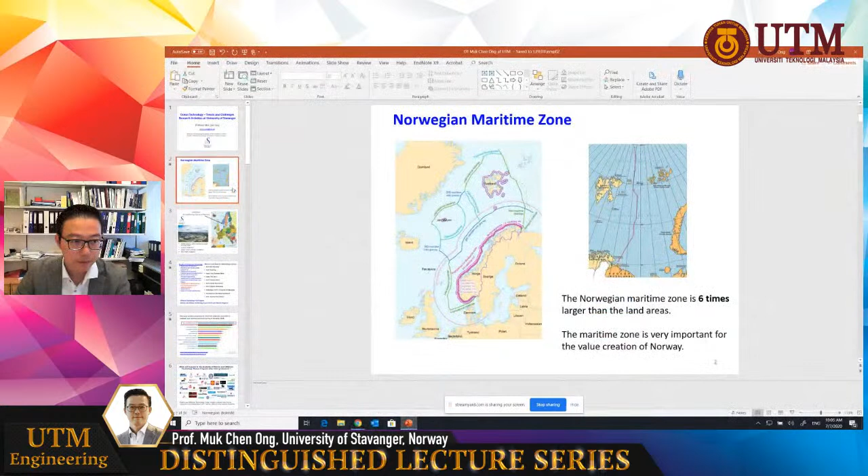Sorry, Prof, you forgot to share the screen. I forgot to share the screen? Let me see. Can you see the screen now? Is it good? Okay, thank you, Prof. Ong. It's okay now, thank you. Okay, sorry for that, some technical problems here. Okay, I'll restart the presentation.

Today I will present the topic of ocean technology trends and challenges, mainly focused on the activities in Norway, and I will also talk about the research activities at University of Stavanger. First, I'll give an introduction, talk about Norway, and how Norway actually gets its wealth. Norway is one of the richest countries in the world, and we get this wealth actually from the sea. This is because the Norwegian maritime zone is 6 times larger than the land area. A lot of people know that Norway also gets a lot of fortune from oil and gas, so the maritime zone is very important for the value creation of Norway.

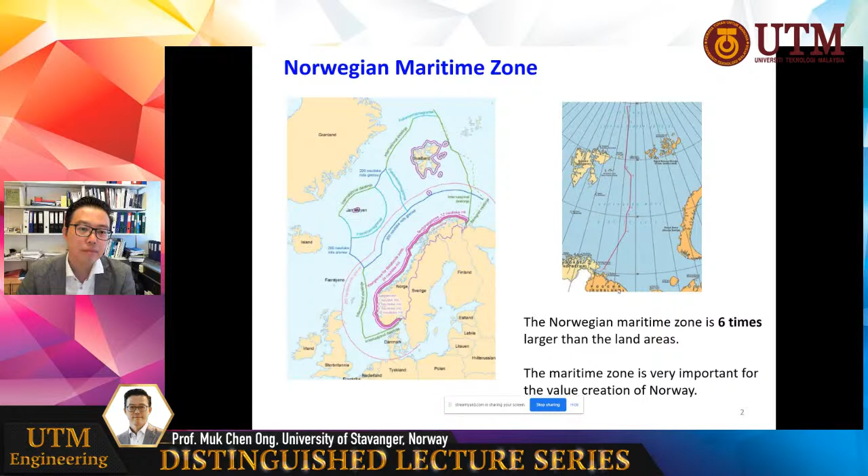First, I would like to give an introduction about my university and the city. We are located in Stavanger. Stavanger is known as the oil and energy capital of Norway because most of the North Sea oil field is near Stavanger. Our university is the 5th largest university in Norway, and we have 1,600 faculty, administration and service staff. We have 12,000 students, 1,560 international students, and 265 PhD students.

And this is the campus. So we are a compact campus, all the faculty is in the same campus, and we are surrounded by the sea.

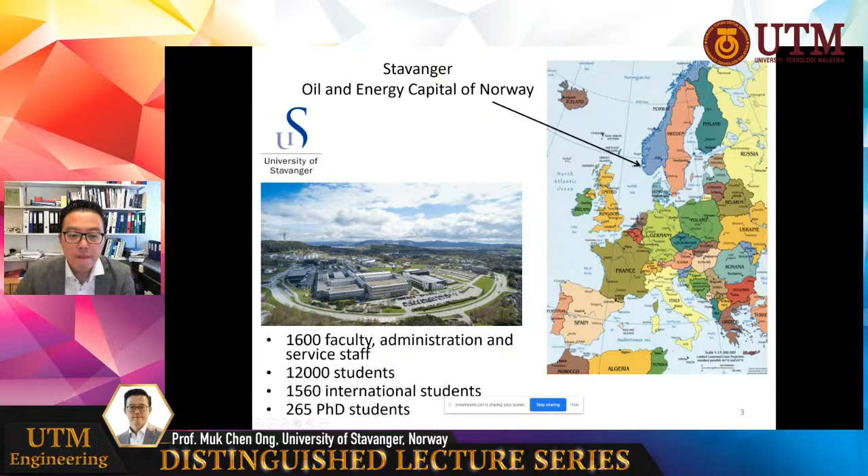First, take a look at our faculty. We have several departments in the faculty, 7 departments in total. My group is at the Department of Mechanical and Structural Engineering and Material Science, and the marine group is one of the divisions in this department.

In the marine and subsea technology group, we have around 10 professors. We have full professors, associate professors, and also adjunct professors from industry, from big companies like Equinor and Subsea 7. We also have senior professors as professor emeritus in the group.

We are running a PhD program, the offshore technology PhD program, and we also have a direct 5-year master program and a 2-year international master program in marine and offshore technology. I'd like to let you know that education in Norway is free. So if a student has finished their bachelor degree, they can go for this 2-year international master degree in offshore and marine technology, and the education is free. The student just needs to pay for their cost of living.

Now look at our master program. For this marine and offshore technology program, every year we have an evaluation. In 2018, our marine and offshore technology program got feedback from students and industry, and we actually ranked #1 in Norway for electrical subjects, mechanical subjects and mechanical engineering. It means that our study program is very popular.

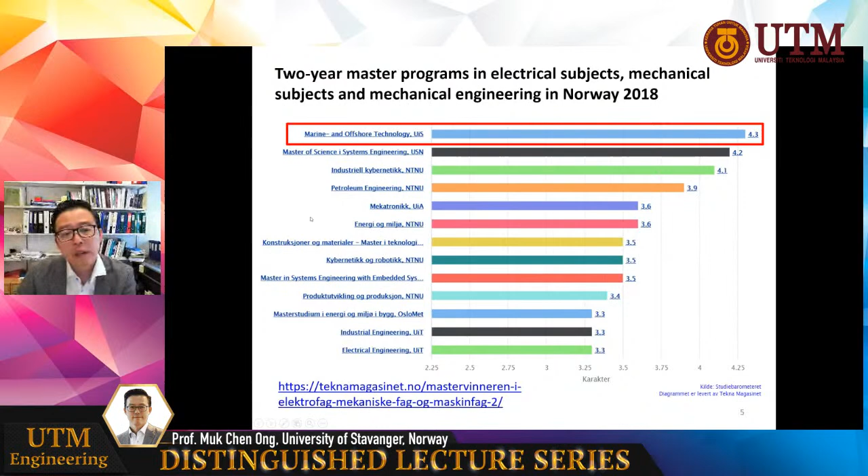After graduation, students can join companies like Equinor and Aker BP. They can even become PhD students at NTNU or our own university, continuing their studies as a PhD student. The PhD student in Norway is considered staff, so they get a salary.

Our marine offshore technology 2-year master program has a very strong connection and cooperation with the marine, offshore and subsea industry, so normally students get case studies from the industry. Why I introduce this is because before we show the topics, we need to know what study program we have so that we can support the industry. So the industry and the university work hand in hand in Norway, very closely.

Okay, now we have the study program, the teachers, and the students. Now we try to talk about the strategic areas. In our university, we have 5 strategic areas. The first one is oil and energy, mainly focused on the reservoir and also other different types of energy.

We also have a strategic area called Ocean. It means that all the research activity happening in the ocean will be covered in this strategic area. And we have health, ICT and infrastructure, and also safety.

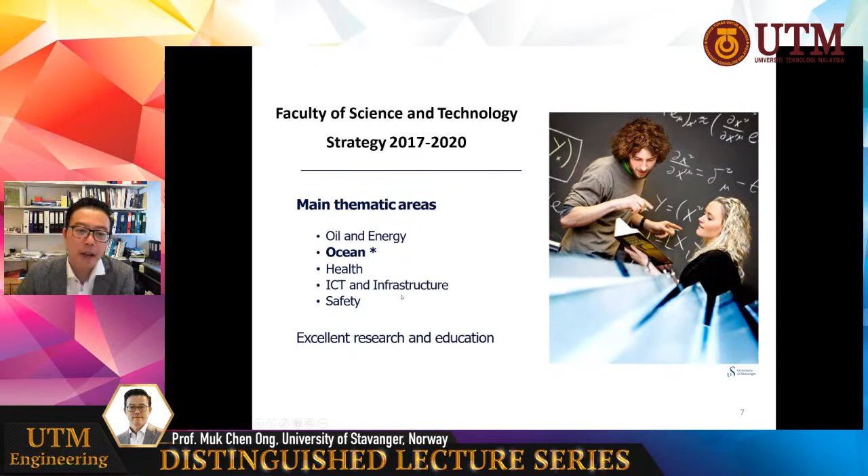I'm the person in charge of the Ocean area. Instead of myself alone, I created a center called OTICS with another 13 professors from 5 departments from the Faculty of Science and Technology, including the business school. So we cover technology, risk management, and also the economy and business. We do that because we also apply for a lot of EU funding, and now all the funding talks about technology, impact factor, and also how to work with social science, so we need a complete team to tackle it.

All these professors come from different areas: ocean technology, petroleum technology, wind technology, also business, also biomechanics. But mainly we are working on topics related to oceans.

Okay, now we have the people, we have the topic, and then we are trying to see what kind of tools we have. First we talk about our competence.

We focus a lot on the marine advanced computational job, the research work. So I have a group called Marine Advanced Computation Group, and what we focus on is marine operation and installation. When we work with industry and train students, we want them to do well in the industry, so all the simulations should be fast and accurate. We work on marine operation and installation, which can provide a quick solution to the industry.

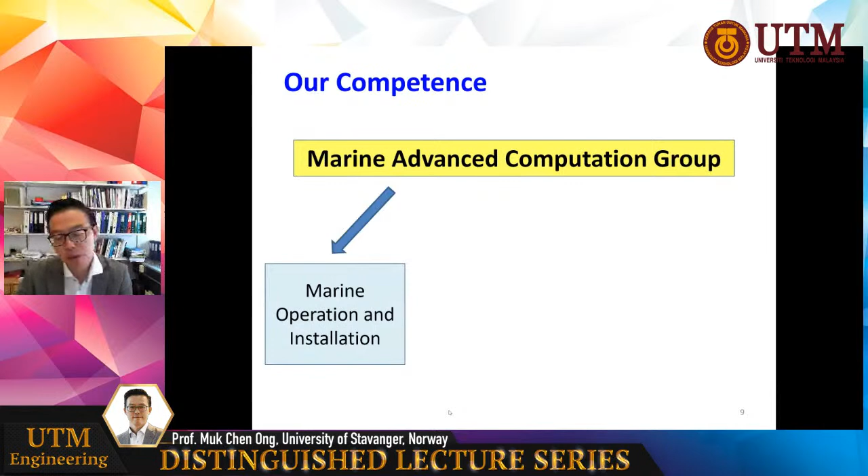Next, we have the high fidelity research work on marine CFD, marine computational fluid dynamics. This is high fidelity, and we use supercomputers to run the case so that we get the high fidelity result, to support the marine operation and installation.

Also, we have another team working on advanced mechanical analysis. This is mainly focused on material technology, because in the subsea, the materials are very important. So these are the three main lines of what we are doing at the University of Stavanger.

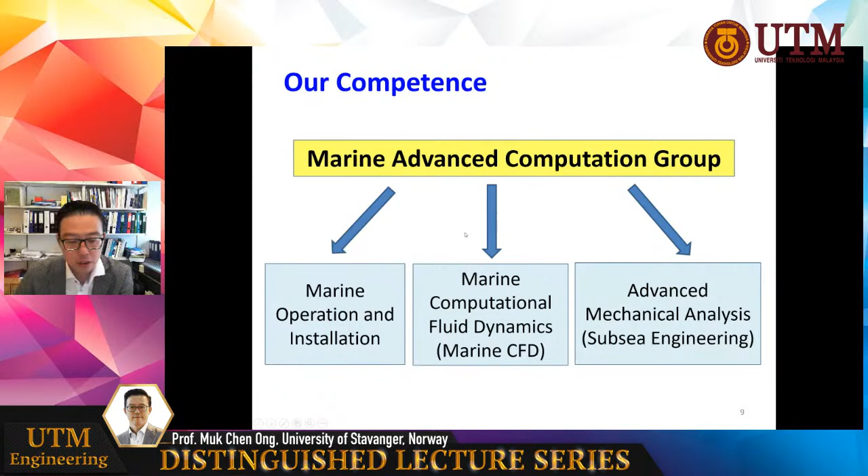Before we go into the topics, we like to see what kind of tools we need to do the job. We have SIMA, the Simulation Workbench for Marine Applications, created by my previous employer, SINTEF Ocean, because I was a researcher there, one of the largest research centers in marine technology. So we have this software called SIMA.

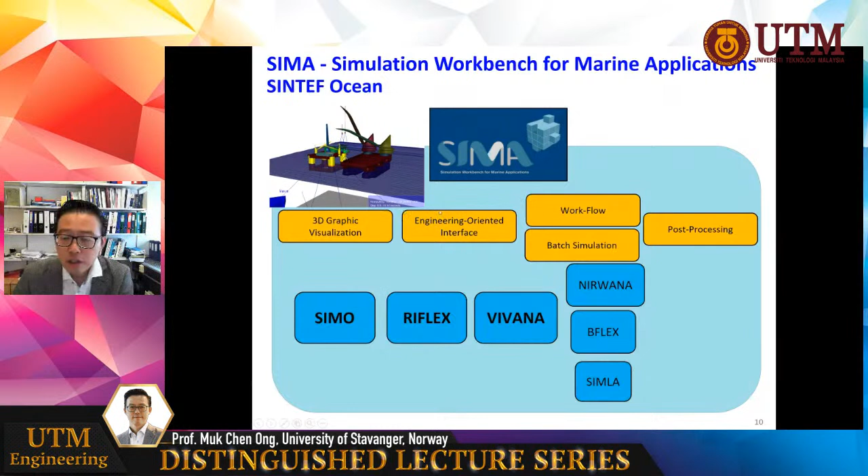Now SIMA is managed by DNV GL for selling, meaning it's sold through DNV GL. We can do lifting operations, we can do the dynamic response of the fish cage, large fish cages, semi-submersible type fish cages, and also we can do VIV for riser and pipeline, and fully coupled offshore wind turbine simulations.

We also work on a lot of open source tools. I would like to introduce this one we are working on, called Code_Aster. Code_Aster is actually created by EDF in France. They use this code to do nuclear plant design. It's not meant for marine technology, but as a university, we like to have open source so that we have better control of the simulations.

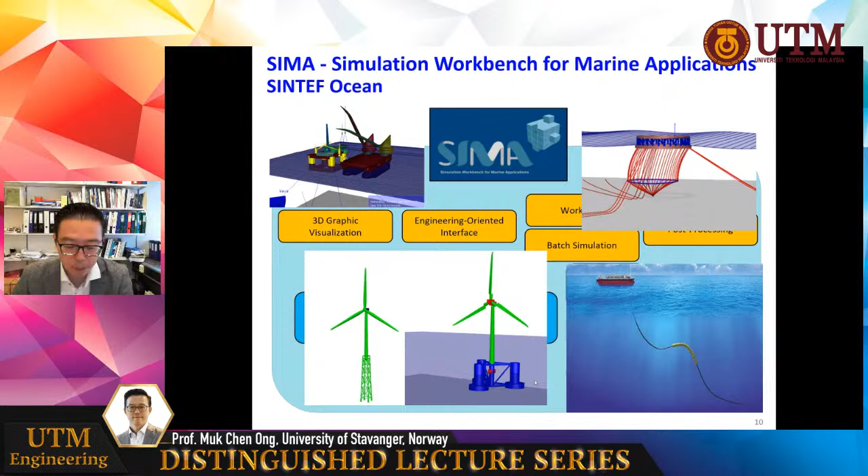The previous one, SIMA, is a commercial code. As a Norwegian university, we can write the DLL, because I worked in SINTEF before, so we can modify the code together with SINTEF, but not for people who just purchase this commercial code. For Code_Aster, you can change the code, you can modify it. For example, this code is mainly built for nuclear plant design, but we actually transformed it for marine technology.

Like this is the dynamic response of the fish cage. We write the hydrodynamic code inside so that we can predict the behavior of the fish cage.

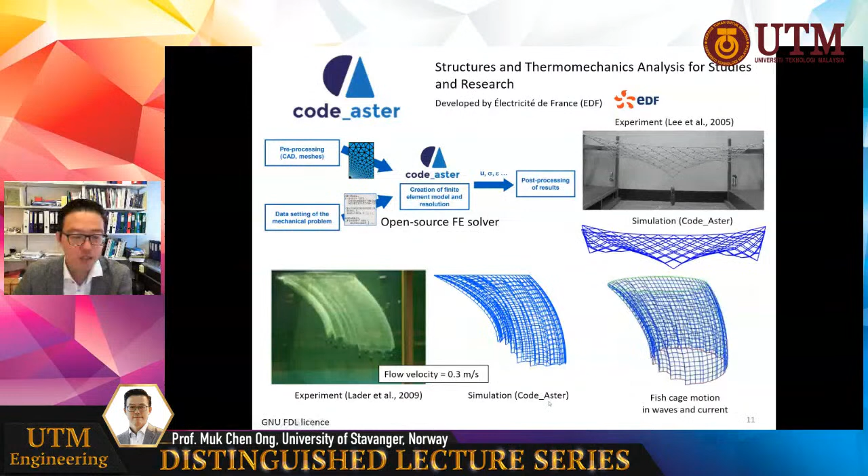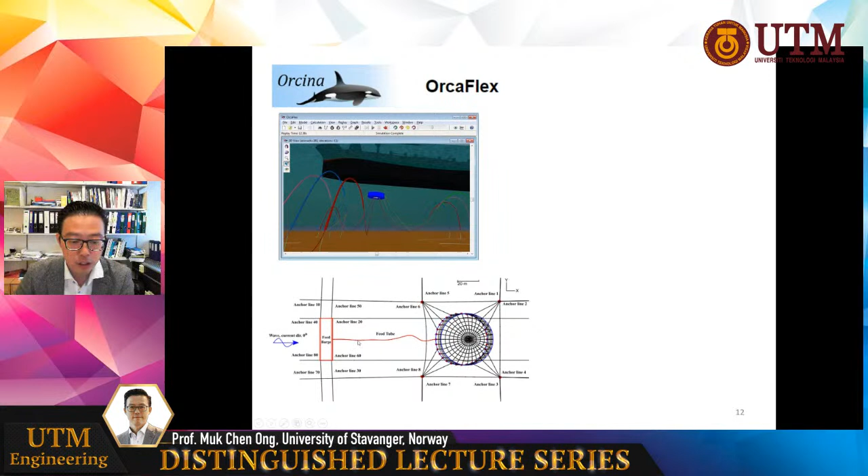We also teach OrcaFlex in our study program, because OrcaFlex is a very important commercial code for students to get a job, and we like to ensure our students will get jobs. This is using OrcaFlex to simulate the feeding hose, how the feeding hose actually supplies the feeding tube to feed the fish in the fish cage.

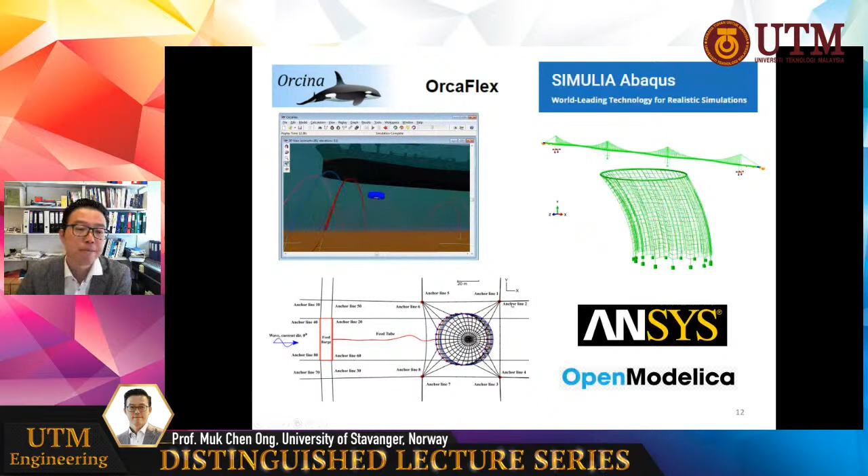We also work on Abaqus, which can do bridges, offshore bridges, including the fish cage, and we also have ANSYS and OpenModelica, also open source, to do offshore wind turbine simulations. So all these software provide quick solutions.

Now we talk about the high fidelity software, the code we are using. We are using OpenFOAM, which is open source CFD software.

For example, on the right side, I show you two pipelines. This is a project I worked on together with Equinor, previously called Statoil. What we are doing is trying to see the interaction between two pipes. The first pipe actually protects the second pipe. You can use the standard, the DNV standard, to design for VIV on the first pipe, but not the second one, because the second one is subject to wake-induced vibrations. So then we need to use CFD to simulate the direct response of the second pipeline.

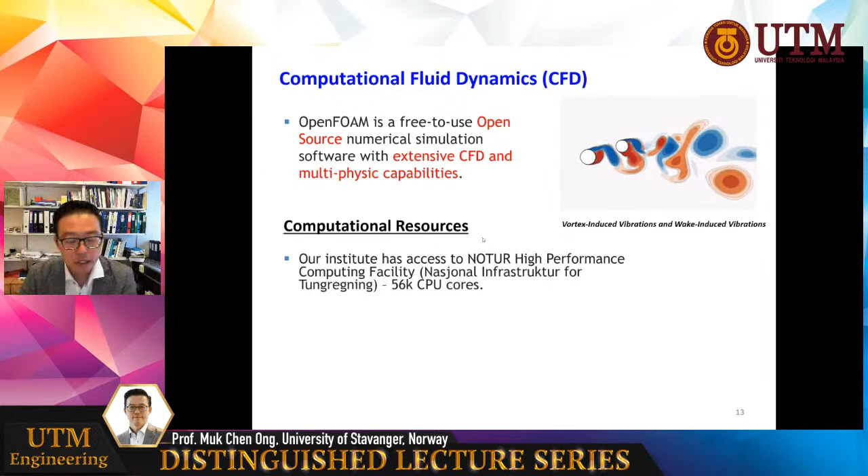If you talk about CFD, we would like to talk about the computational resources we have, because it's very important to have a strong computer and cluster to do the job. Our institute has access to the NOTUR high performance computing facility, a national infrastructure with 56,000 CPUs. We get a minimum of 3 million CPU hours per year from NOTUR, meaning I can run 345 CPUs in parallel for 365 days.

It means every day non-stop, every second I can run 345 CPUs. This is only the minimum. If we need more, we can request more CPU time, as long as, of course, we come up with good publications and good research work.

And ourselves, we have bought a supercomputer cluster in our own university. We own 584 CPU cores for small scale simulation.

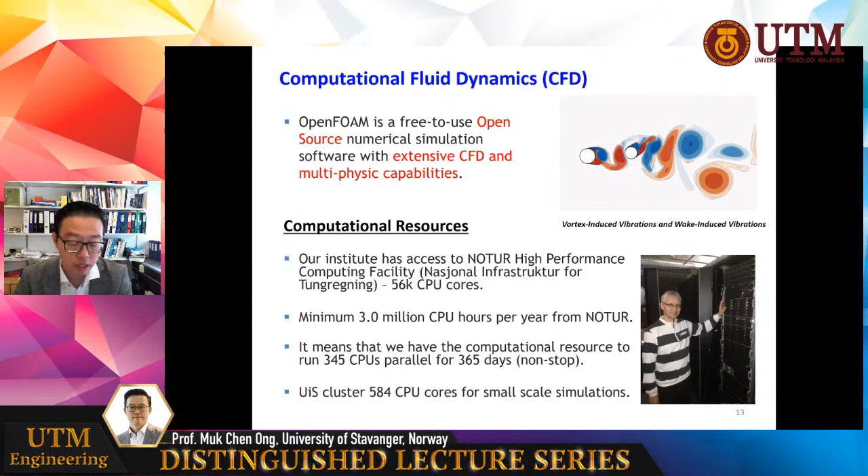You can see this guy, he's very happy because every time I got money for him to buy the computer, he's so happy because he likes to do Linux systems, and he helped me maintain all these CPUs at our university. Mainly when the PhD students are working on big simulations, they use the national infrastructure, the supercomputer. And when the master students or bachelor degree students are doing small jobs, they use our own small cluster, the 584 CPU.

Okay, so we have these tools. Now we have the study program, we have the teacher, we have the students, and we have the tools. It's time to look into the topics.

Currently you need to use the ferry to transport the car. So we're going to build submerged bridges and tunnels, and all these activities differ depending on water depth. In different water depths, we have different activities, so we design the areas based on all these activities.

Based on the current situation in Norway, we educate the students. What is important for the student? To get a job. They want to get a job, they want a good job, they want to buy a house, get married, and have a good life.

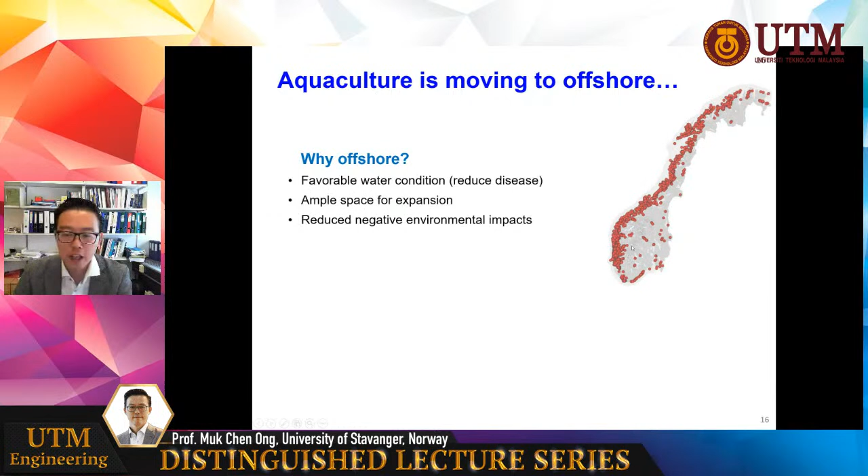It's quite crowded, and the Norwegian government cares about pollution and environmental issues. So they hope fish farmers can move the cages offshore, to get better quality fish and also to protect the environment. But offshore, we have challenges.

What are the challenges? There are harsh environmental conditions—larger wind, wave, and current loads, which are very tough for structures. We need to design robust structures. For example, with fish farming, the fish are inside the cage.

What are fish afraid of? Fish can get seasick too. If you have large acceleration, like sitting on a flight where the speed changes—acceleration or deceleration—you get sick, feeling like you want to vomit. It's the same for fish. They need a very good environment to stay inside the cage so they can grow in a better way, giving you better fish.

So the design of robust structures is very important. We also talk about operation and maintenance costs, because going offshore increases operation and maintenance costs. These are all new challenges we need to think about.

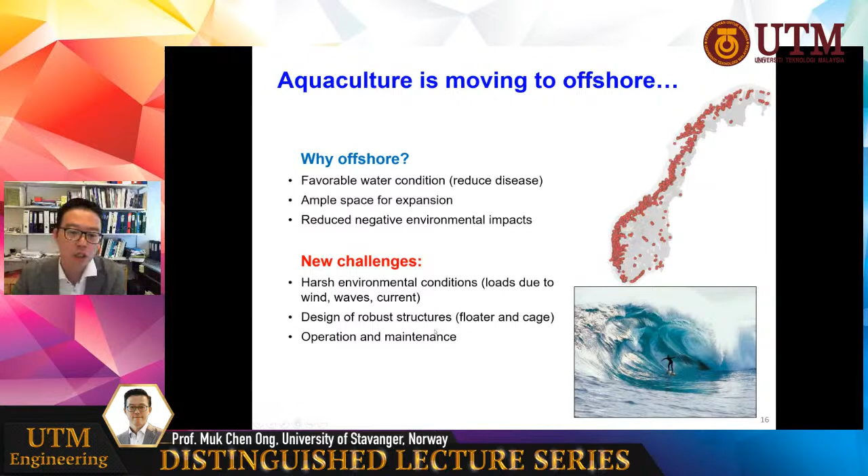When we are doing this aquaculture technology, we start with the conventional fish cage, which is a gravity-based fish cage. This fish cage is light, and the significant wave height they can withstand is up to 2 meters, with around 200,000 salmon inside.

We also work on this single moor system, so that this mooring is like one single point moor. Then the fish cage can turn around the anchoring point, so that you get better flow conditions.

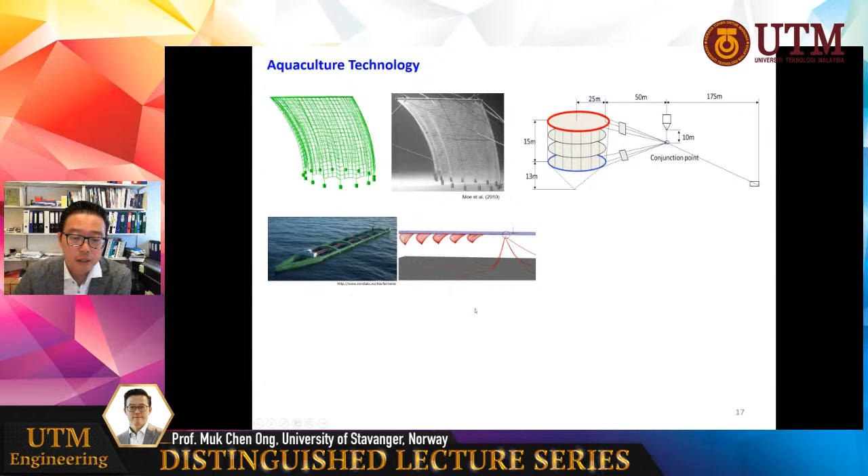We also work on the large fish cage, like for example, this cage is called Havfarm, and you have 2 million salmon inside. Then we study the dynamic response of the fish cage, and also we have the semi-submersible fish cage. We work on this also. All this work has been done by our master and PhD students together with the company.

We are also working on the feeding tubes and how this feeding tube actually feeds the fish. You see all the fish cages here. Previously they used a boat to feed the fish, but when the boat comes in, the propeller actually destroys the net. All these farmed salmon, it's not good to let them go into the environment, because they behave differently from wild salmon. So in order to protect the environment, they use the feeding tubes.

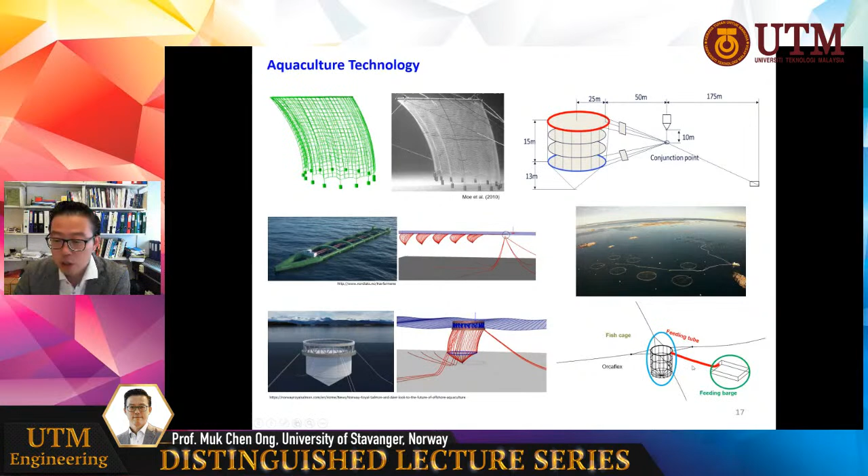But these feeding tubes are subject to fatigue problems. So we do a lot of dynamic simulation to study the fatigue, design, and response of the feeding tube, so that you get a better design for the fish farmer.

At University of Stavanger, we work together with Harbin Engineering University. Actually, we have our own patent, our own fish cage. It's called module-based offshore fish farm. Each cage can accommodate 400,000 salmon or cod fish even, because we use a strong material, so that we can raise different types of fish.

One good thing about this fish cage is that when the flow comes in, there's no blockage of the flow, so you get very good water quality in the fish cage. And even if in some cage the fish is sick, we can remove it and treat the fish in a good way.

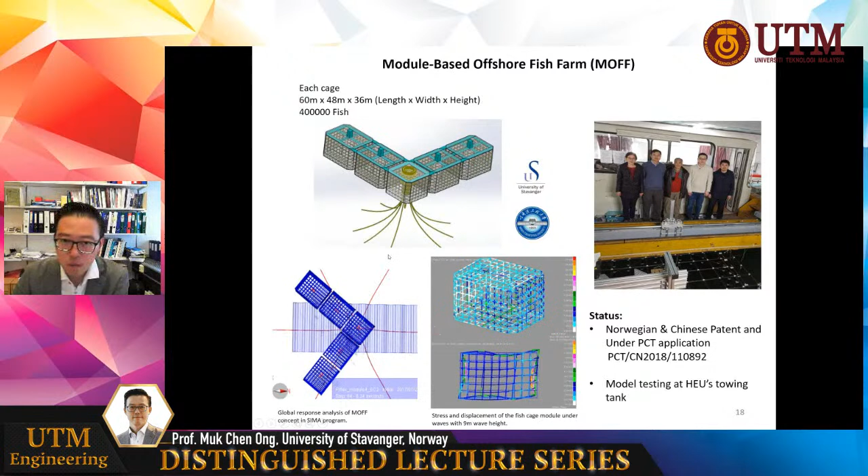So this is our cage called MOFF. We already got the patent, and we even carried out model testing in the towing tank to study the behavior of the fish cage. The next step we are going to do is the sea test.

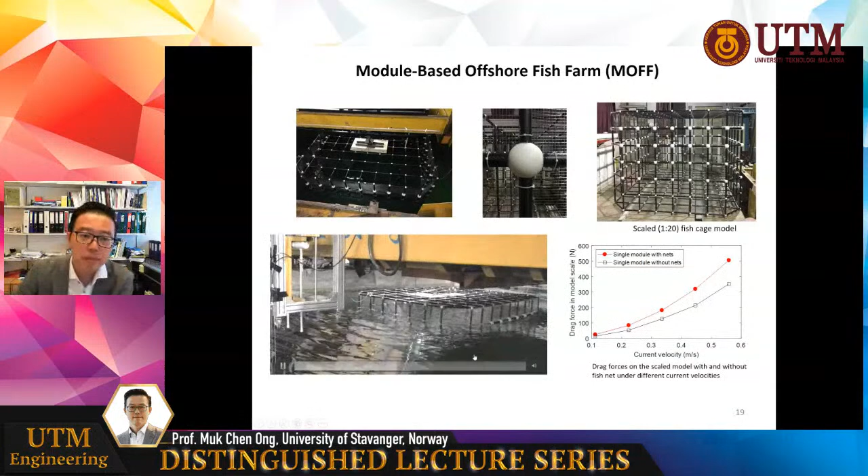Another one I'm trying to introduce to you is the land-based cage. This is called flow-through tank, and we work with South Korea, Chonnam National University. What we are doing here is they have the fish inside the tank, but they need to study the oxygen level in the tank. So what we did is create the CFD model, including the transport equation for the oxygen concentration.

We let the flow come in and study the concentration of oxygen in different areas. If in the empty tank there's a good oxygen concentration, it means that when the fish is inside the tank, the condition will be even better. So this is how we have done the job for the land base.

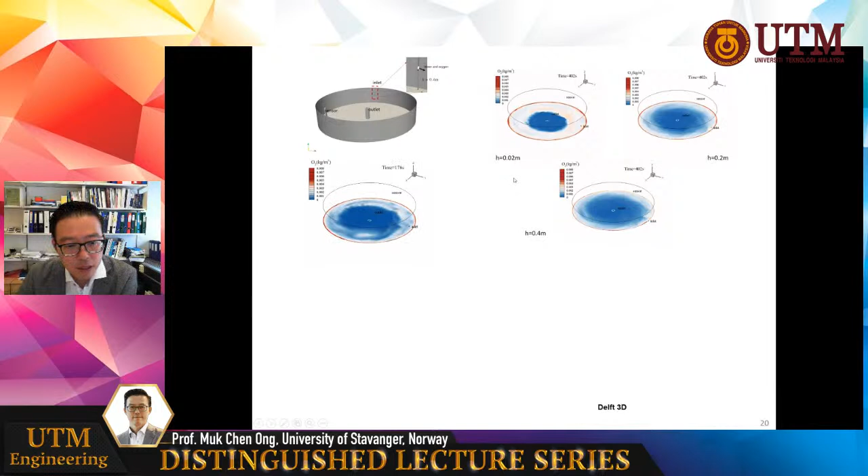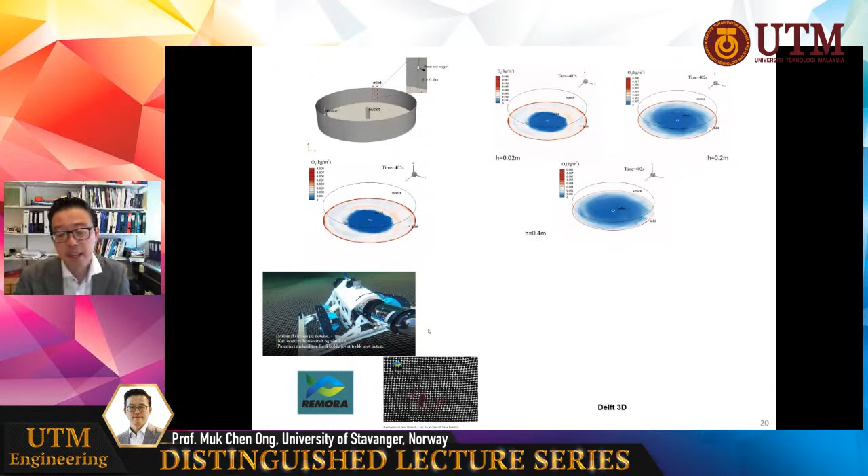We also work on the salmon lice. The sea lice is a big threat to the salmon. We can do ocean modeling because the sea lice actually flows together with the wave and current, so you can see the sea lice is very smart. They attack the fish head, but not the fish body.

In Norwegian fish farming, they use another type of fish inside the cage to eat the salmon lice. But the salmon lice is very smart, it moves to the head so that kind of fish, called lumpfish, has no chance to eat the sea lice.

So the sea lice is very important. We need to have a good flow condition. Then we can introduce the sea lice concentration and put it into the ocean modeling, combine them, and then we know where the sea lice are.

And even we can study the environment DNA. Every fish has their own DNA, like for human beings we have hair, skin, all this - it's called environment DNA. We can use the environment DNA of the prawns or the fish as a source, and then we can know where the fish are by doing these ocean modeling simulations.

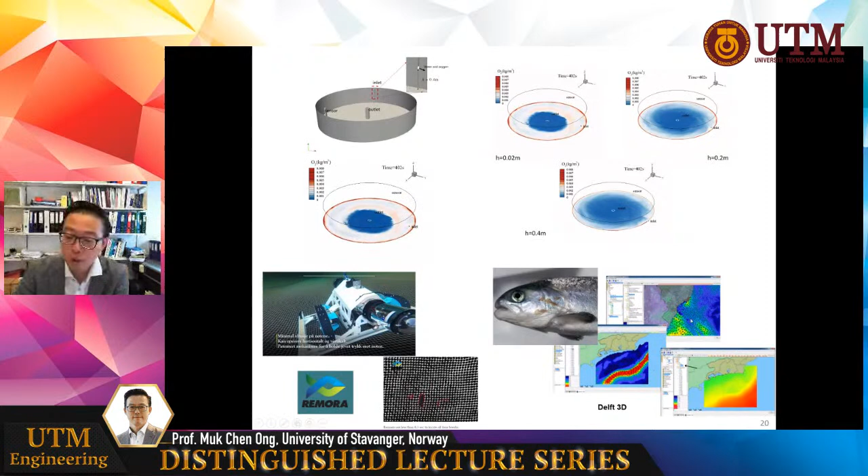University of Stavanger, my team is also part of the research partner in this Smart Aquaculture Research Centre in South Korea. The principal investigator is Chonnam National University, so we work together with them. This research center started in 2019, and total we have around 6.2 million US dollars for 7 years. So we work on different types of aquaculture systems.

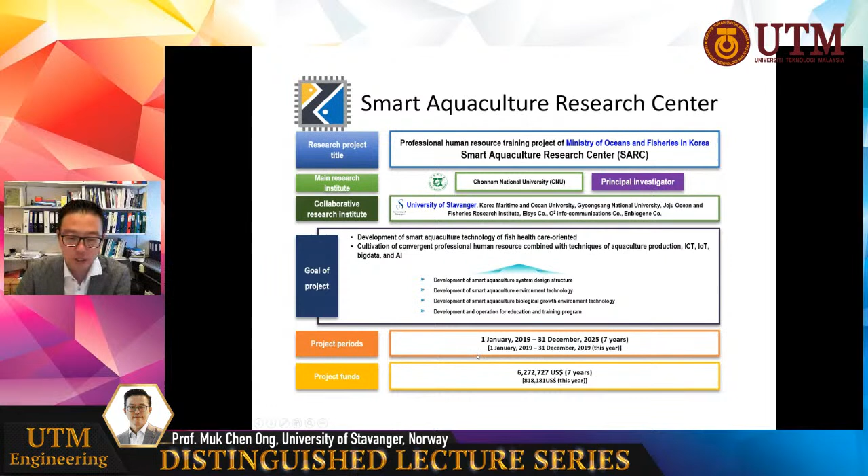Okay, so I have completed the part for the aquaculture technology. Now we go to the next area, which is offshore and subsea technology.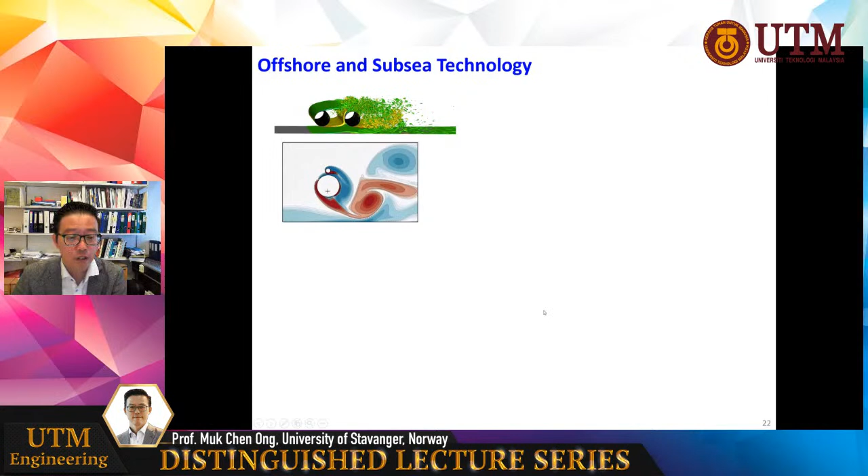We also study the FSI, fluid structure interaction problem for the piggyback, to have a better design of the piggyback. And this work has been used to create a new energy converter for 5 kilowatts, called VMAX - our own invention called Vortex-induced motion energy converter.

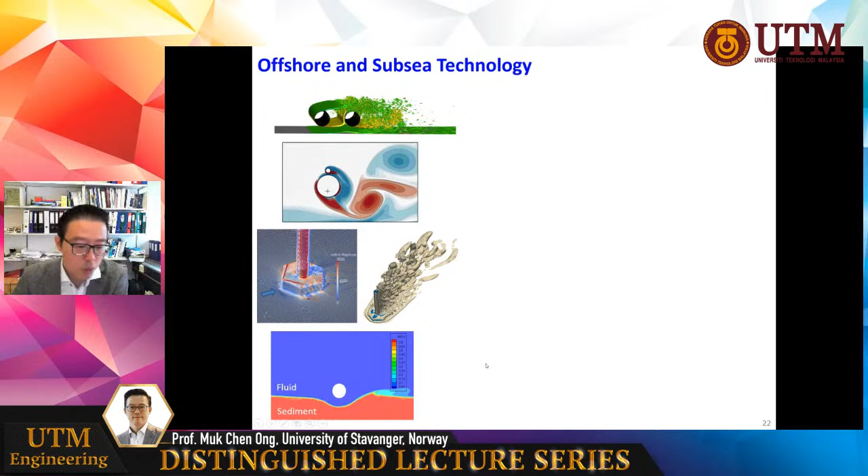We also study the flow around the foundation, the offshore foundation - this is gravity-based structures. We study the flow around the foundation, and we have an open source tool for scour erosion. We are working on this tool to predict scour erosions, and we have already published this open source.

This was created by University of Stavanger, and it's for liquefaction. So you have the wave coming, and you can change the pressure upstream and downstream of the foundation, and then you can create internal flow in the soil and weaken the soil so that the foundation can sink. So this is very important for us to predict the liquefaction situation beneath the offshore foundation.

We also work on the optimization of ROV shapes, and then we study how this ROV can have better performance in the subsea environment.

For example, this ROV - that time we got this job research study - the ROV could not go straight, it always went to one side. Then we used CFD to study the flow around the ROV, and we advised the partner that this part is not good, we can modify it based on our numerical simulation result, and the ROV actually can go straight very well. We also study internal flow, multi-phase flow in the pipe.

And we study the subsea cover. The subsea cover actually is to protect the pipeline and the subsea module. We study the drop object, how the drop object actually hits the subsea cover to protect the subsea module inside it. And we do lifting operations using numerical simulation.

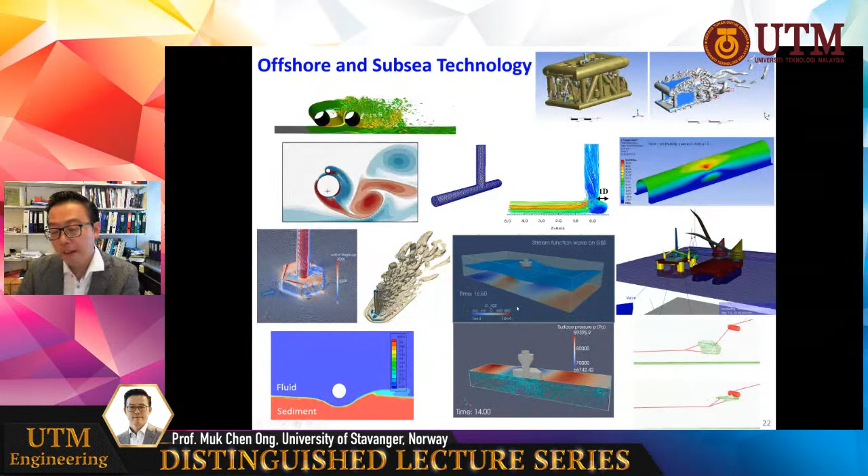In the subsea area we have high pressure. We study the material, the crack propagation, also multi-phase flow, and for the ROV, how to improve the thruster. We use OpenModelica to study the thruster, to find the best configuration for the ROV.

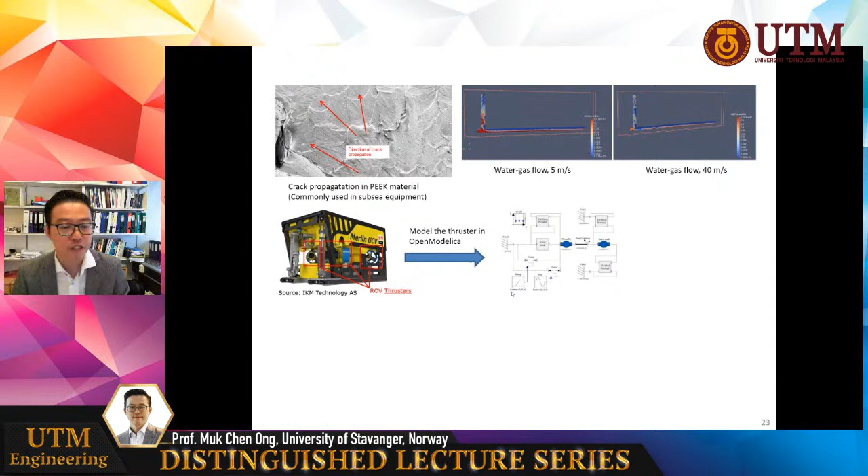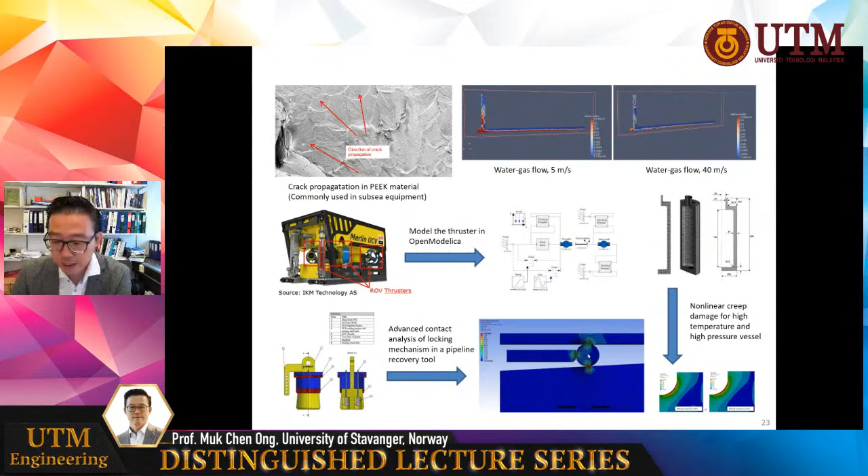We are also working on some special tools to remove damaged pipeline. For example, you have pipeline damage, you cut it, and then you put in recovery tools. We study the contact mechanics so that we can lift the damaged pipeline, which has been cut, up from the sea. We also study the high pressure vessel for subsea equipment.

Now I would like to introduce another project we work on with Equinor. We carried out the prelim study for Equinor. This is a subsea shuttle, a submarine that is 135 meters long and 17 meters in diameter. The purpose of this shuttle is to transport CO2.

This subsea shuttle will be fully autonomous in the sea, and you can see this video from YouTube. It transports the CO2 and then returns to the reservoir so that we can get enhanced oil recovery. So this is the subsea shuttle we worked on, including the design and the prelim baseline design.

We also work on the 3D simulation, using hydrodynamic simulation and CFD simulation to optimize the shape of the subsea structure, the subsea shuttle. So this is the work we did with Equinor.

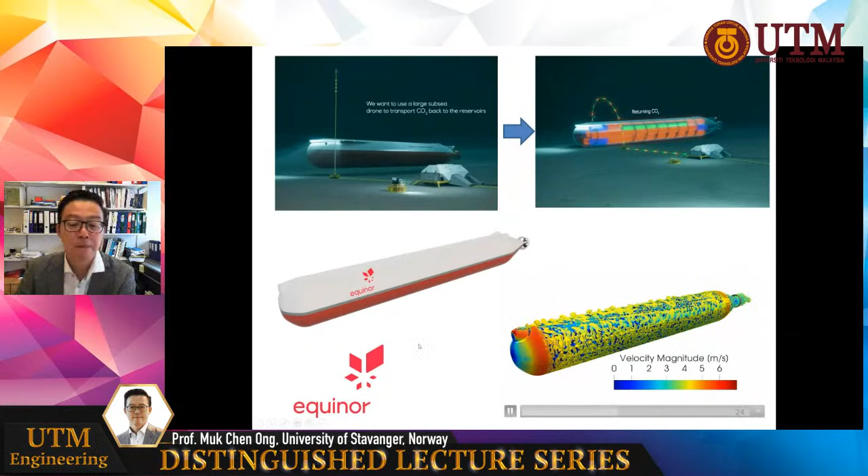Okay, so that covers offshore and subsea technology. Now we come to the next topic, offshore wind. We have done the monopile, the bottom-fixed monopile, and also the combined monopile and jacket bottom-fixed wind turbine. But for bottom-fixed, the largest water depth is up to 60 meters.

So beyond 60 meters, we need to use a semi-submersible. We also work on semi-submersible structures, and on different types of wind turbines, including the vertical axis wind turbine. This is called horizontal axis wind turbine, and this is called vertical axis wind turbine.

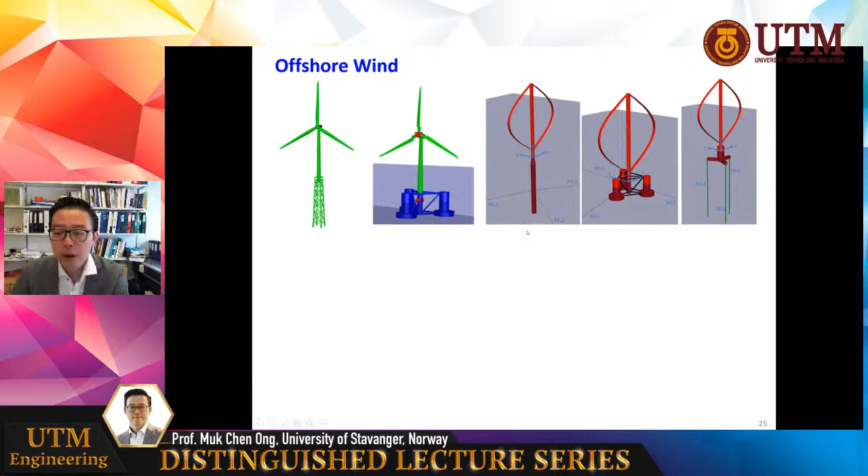We also work on different types of floaters, including spar, semi-submersible, and TLP, tension leg platform.

We also combine offshore wind together with the wave energy converter. As a standalone wave energy converter, it's very difficult to get profit because the cost is high. So we attach the wave energy converter to the offshore wind turbine, and we found that we can reduce construction cost and also increase wind energy by 7%. So the total energy from the wind, with this wave energy converter attached, we gain an extra 7% energy. This is a very good gain.

We are working on breaking waves CFD simulation to study the impact force of breaking waves on the monopile and other offshore structures, even floating turbines and floaters. We also study the flow around the foundation to examine scour erosion and the lifting operations for wind turbine installations.

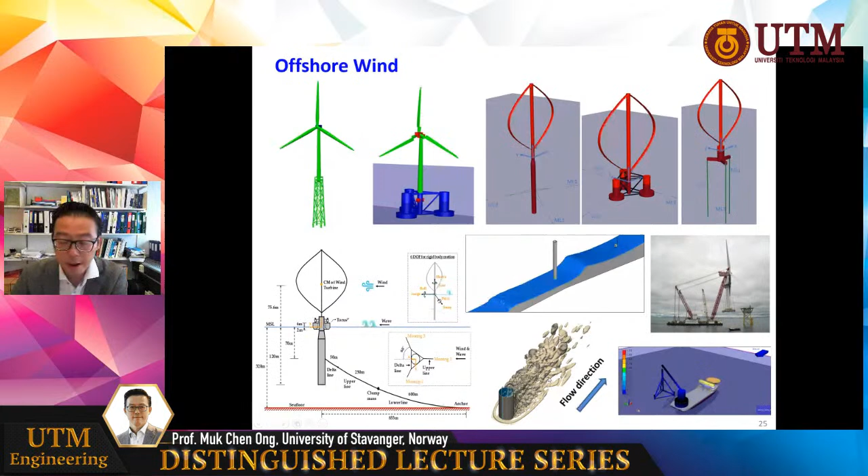We also work on the drivetrain, the gearbox, everything inside the wind turbine, combined with rotor analysis. So we study the whole wind turbine response, then go into detail on the drivetrain and gearbox, to see how we can achieve a good design to get the best energy out from offshore wind.

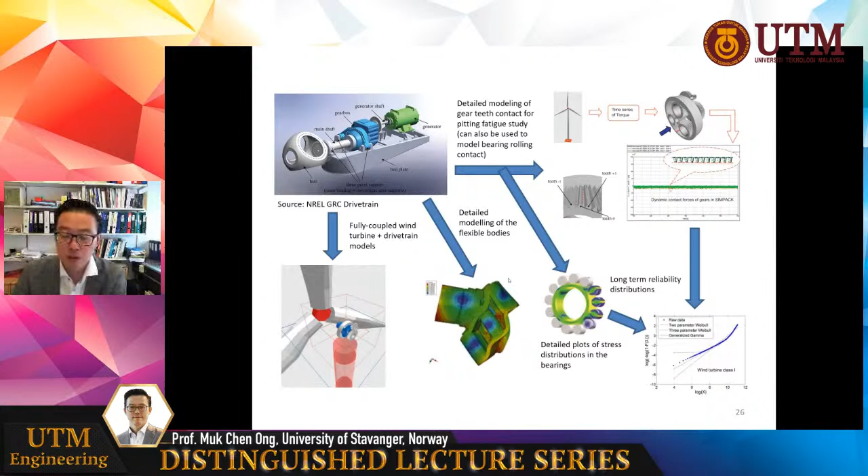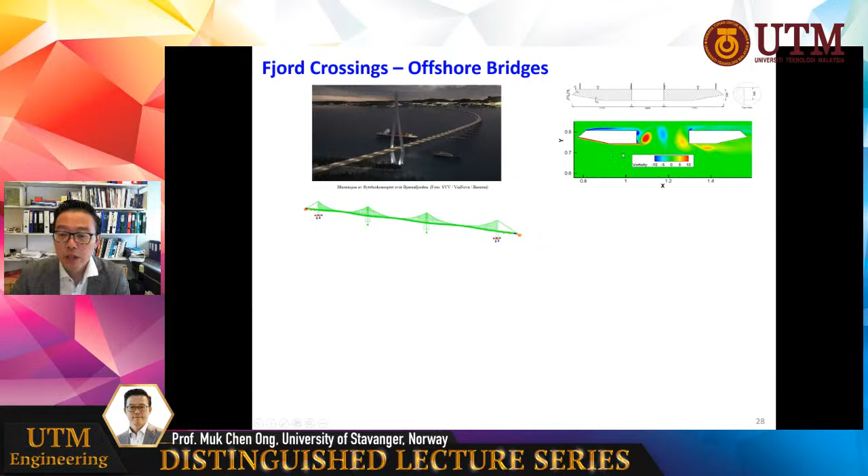Okay, that covers offshore wind. Now we come to the last area, which is fjord crossing. As I mentioned earlier, Norway is going to build a lot of floating bridges to connect the islands. We can do the fully coupled simulation of the bridges, and we also study the aerodynamics to optimize the shapes of the deck.

This is the cross-section view of the deck. Previously I worked on two decks, where the two decks are actually close to each other.

Normally for bridges, the decks are side by side, so you can have some shielding effect and less vibration. But some bridges are designed with one deck up and one down, for example the train on top and the car below, though normally they have a large distance between them.

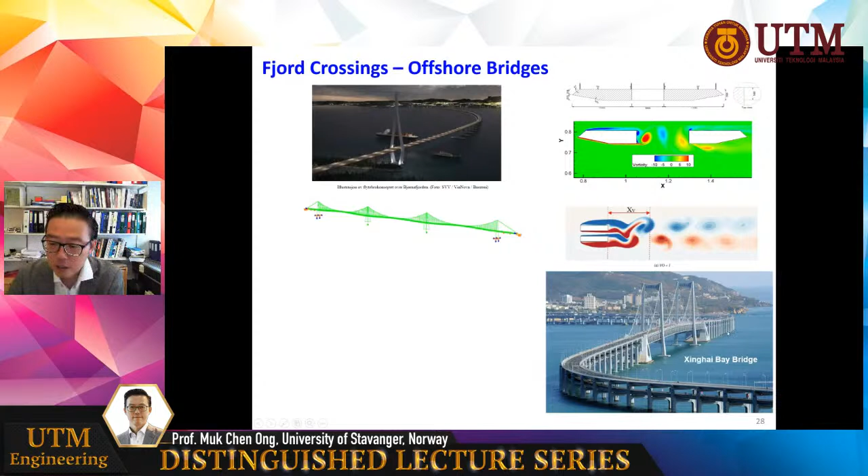When I do this research, I try to put two decks very close to each other, and a lot of people tell me this is not possible because you can create a lot of vibrations, since the contraction of flow between the two decks will cause vibration. But in China, in Dalian, the Xinghai Bay Bridge, you can see they put the two decks very close. Human beings are very smart, so they put a lot of stiffeners to stop the vibration. But another problem with so many stiffeners is you can create scour erosion, so you need to use scour protection for this design.

We also work on turbulence modeling. Since we want to design the bridge, we need to know the wind, the turbulence. We do LiDAR measurement to study the turbulence effect, and then we use it as an input for the design.

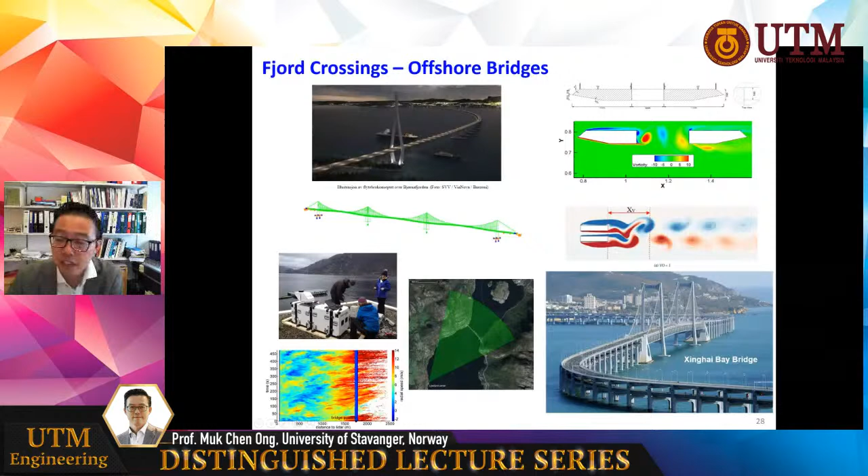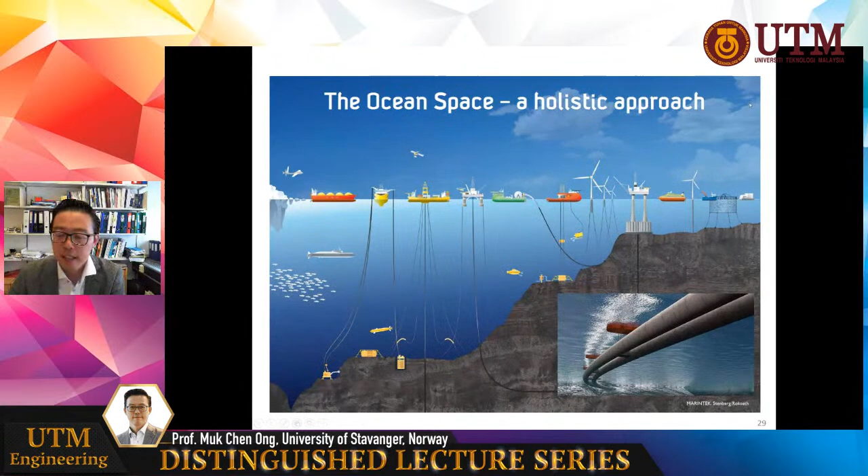Okay, basically I've covered four areas. I talked about our university, about the professors and teachers, about the students and study program, about the software, and about the focus areas, activities, and strategy in ocean technology. My summary is that our work tries to cover most of the activities in the ocean field.